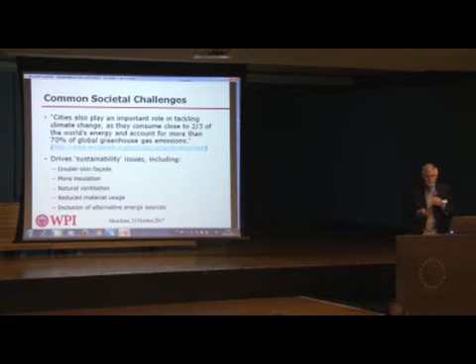We're starting to build facades that could be very concerning. Part of the challenge is that the environmental focus doesn't think about fire safety. We have a history of disciplines working in silos, separated from each other - urban planners, architects, engineers, and even within engineering, structural engineers, fire, mechanical. If people aren't really talking to each other, we set up this challenge of competing objectives, and sometimes you lose a particular feature or function of a building, and it could be a safety issue. But that's a whole nother discussion for another day.

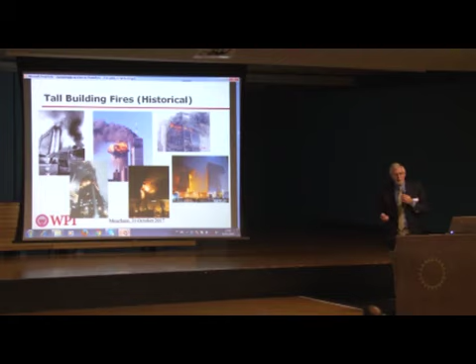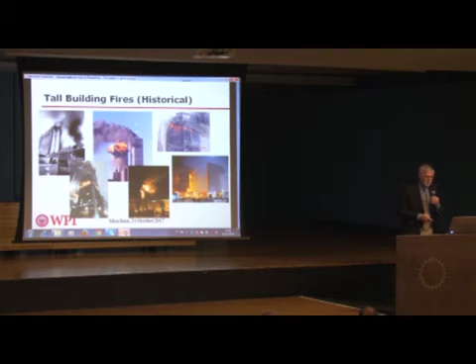I won't talk about historical fires - Professor Sekizawa did a very good job of that. But we unfortunately have very good examples of what not to do in buildings. The problem is we seem to keep repeating some of those problems. Even though we understand them, we seem to have a problem repeating them. One challenge we have today that we didn't have as much a few years ago is this issue of exterior facade fires. We started to see quite a bit of them in the Middle East region maybe about 5 years ago, and we saw quite a few in China as well.

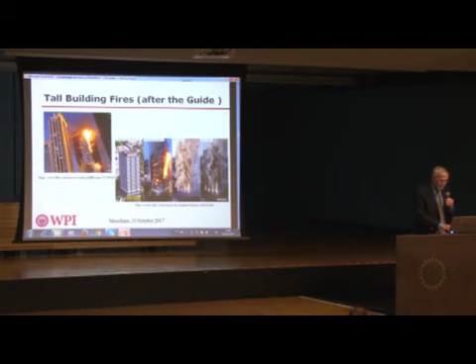We've had some fires in the US, some in Australia, as I pointed out this morning, but it wasn't until the Grenfell fire that people in countries who thought they knew what they were doing really realized there was a major problem with putting combustible exterior facades onto buildings. I'll talk more about that in a few minutes.

But other issues, like elevator operation, Sekizawa talked about that. We know we need to use elevators to move people in and out of buildings, but when you're 800 meters or 1,000 meters and you need to move people, how does that system have to work? How do you have to protect the shaft? How do you deal structurally with not having too much movement in the building so that you don't get the elevator off of its pathway?

Structural fire resistance becomes a big issue because you're not going to be able to effectively fight a fire 50 stories, 80 stories above ground. You need that structure to be able to withstand the expected fire.

Now, of course, we want to have and think about sprinkler protection, but water supplies in very tall buildings are also an issue. Here's a graphic showing the type of solution sometimes used, where reservoirs are built in at various points in the building, and water is pumped up to those reservoirs in normal time so that you're not relying on the pumps and water system in an emergency, and you have gravity feed to help you.

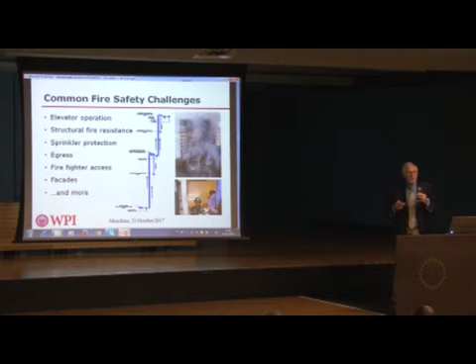And we'll talk about some of the facade issues and more as we go along. So these were all seen as issues that we wanted to somehow address in the guidelines.

In addition, there's also the challenge of local availability of materials and components. There's often the idea that you can look at what another country is doing, look at their standards, look at the equipment, but are you going to get that same equipment into your country? Do you have the same level of installation and maintenance standards? Do you expect things to work in the same way? It can be very difficult to adopt a standard from another country that assumes a certain level of technology, maintenance, knowledge, and performance, but if you don't have that where you're implementing it, it can be a problem.

The local infrastructure is similar—your electrical grid, your water supply system, all these other factors. In some Chinese cities, and particularly some Middle East cities where they're building cities in the desert, you really have to think ahead about putting in all that infrastructure and having a reliable power system. If you don't have a reliable electrical system and you build a super tall building relying on elevators for evacuation, and you don't have power, what are you going to do to get people out of 100, 150 stories? They will walk down the stairs.

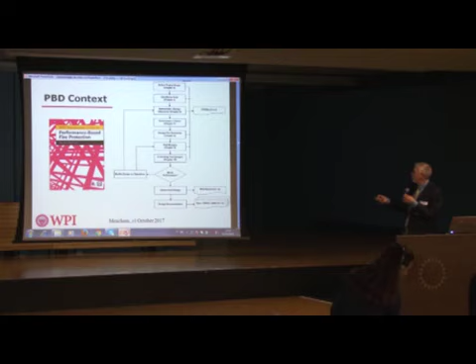So when we were developing the guideline, we took the approach that the only way to really do this was to take a performance-based approach. The guidelines assume you're following something like the SFPE guideline for performance-based fire protection, or similar, which runs through a process of looking at your goals and objectives, performance criteria, design fire scenarios, and so forth.

I won't go through that process in detail—that's a discussion for another day—but it's important because instead of just assuming regulations will address all situations of concern, you should really be thinking about the different issues and go through a hazard assessment, a risk assessment, understand the objectives you're trying to achieve with the building, what the concerns are, and go through a very structured process to do the analysis.

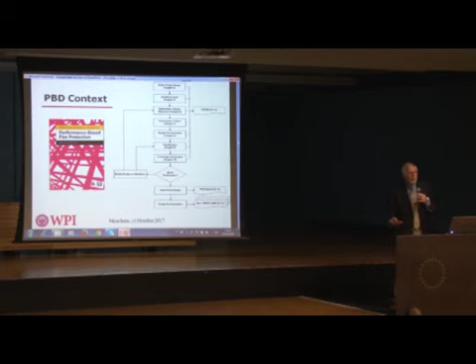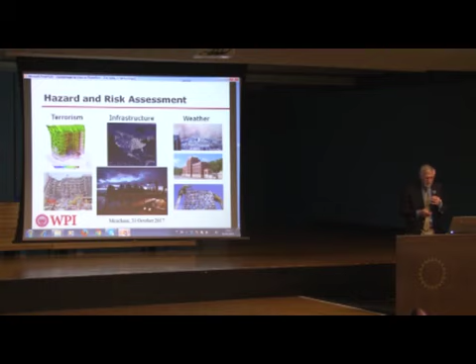So we start the process with a hazard and risk assessment. When you're dealing with very tall buildings, it's not just fire. Unfortunately, we may have to think of terrorism, but also infrastructure: the power grid going out, water issues, weather conditions like very high wind, drought conditions, and others. A tall building with a power outage is a big problem for all the people that live there. Cities have to think about that, not just in terms of fire safety, but the ability of the people, and what additional measures might be needed for life safety systems to effectively get people out in the event of a fire.

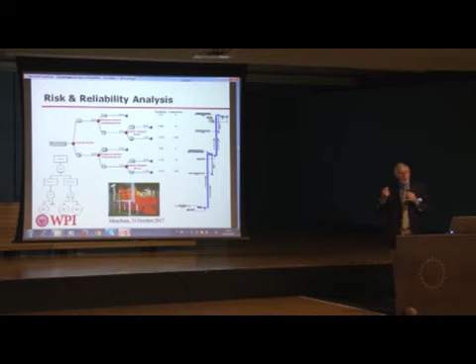We recommend that a risk and reliability analysis be undertaken on the different systems within the building. For example, doing a fault tree analysis of the different failure modes in your water supply system, power system, sprinkler system, smoke control system—all of these areas—to understand if there's any opportunity for what we call a single point of failure, where if you lose a critical system or component, you lose the capacity of that protection measure.

An example of that would be a water supply system for a sprinkler in a tall building. If you have a single riser, single hydrant system going up the building, and you have an event that causes you to lose that riser, now you have no sprinkler protection in the building. There was a very good example of that, perhaps a bad example, the World Trade Center bombing from 1993.

In 1993, the terrorists put a truck bomb in the parking area below the World Trade Center, which happened to be near the shaft which carried the communications and the power up the entire tower complex. So when they set off that bomb, you lost the fire alarm system, you lost emergency power, you lost communication. In the end, it took about 4 hours to completely evacuate both towers, in part because nobody had information.

Nobody knew what to do. People were trying to get information any way they could. Some of the bosses in the companies were telling people to stay, others were telling them to leave, and it was just a very difficult situation.

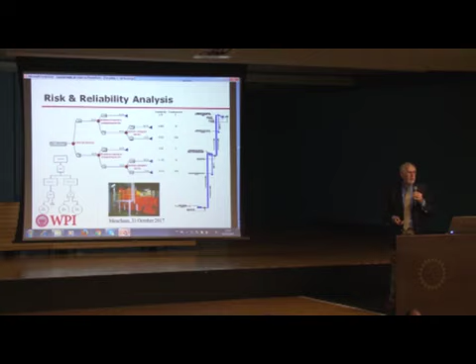We always have to go through this learning process, but we have to really think about what could fail and cause a problem. Then we look at what that problem is in terms of the fire, and we develop event trees that look at scenarios for both how the fire could spread and how big it could be if you have these failure points, but also what the impact might be in terms of getting people out of the building. So we tell people that this is required. We don't give a lot of detail, but we point to, for example, the SFPE Handbook of Fire Protection Engineering, which has several chapters on risk and reliability analysis.

As Professor Sekizawa already discussed, egress is a big challenge in tall buildings. One of the first things you have to do is identify your egress goals. By that, a simple question: do you expect to simultaneously evacuate everyone from the building? Do you expect only to evacuate certain people and keep others remaining in place? Or do you keep everyone in place except for the floor of the fire?

Grenfell, for example, in the UK, had a stay-in-place philosophy. Everyone basically was expected to stay in their homes because the compartmentation of the building was expected to keep the fire to one compartment while the fire brigade came in and did their job. But you have to decide which strategy you're going to use, because that's going to help make the determination.

Do you rely completely on stairs? Do you rely on partial use of evacuation by elevators? And to what extent do you do this combination? So then you have to look at different scenarios and strategies. This building—maybe it's a little hard to see—in Hong Kong, you see these dark areas.

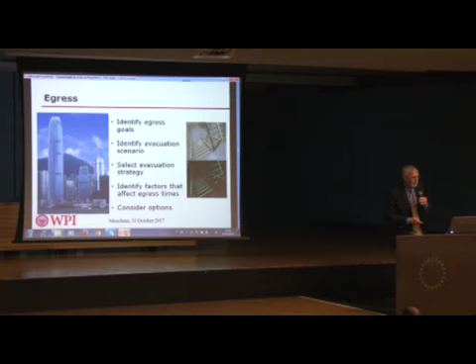So you have to look at those options and decide what strategy to take. If you are going to use stairs, you have to think of the walking time and issues of counterflow. If the fire service needs to use a stair in addition to the dedicated firefighter elevators, then you have reduced evacuation time.

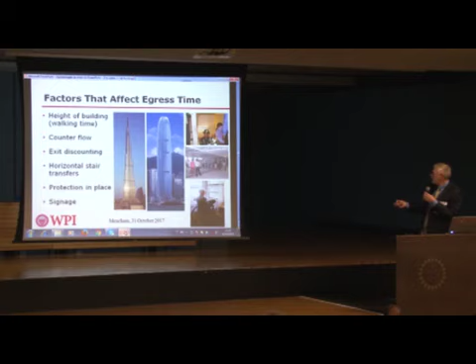Here's an example of what a refuge floor looks like. It's open to the outside, it's sprinklered, there should be no combustibles there, and it's a place where people can rest, because fatigue is an issue if you're going down 100 stories, or if someone has a disability, even a temporary one like a sprained ankle. It's something you need to think about.

Horizontal stair transfers involve coming down to a certain level and moving to another stair. It was interesting in Japan that, I may get the numbers wrong, but above 15 stories the stairs should all be continuous to the ground level. That's very challenging when you have a 100-story building.

It becomes more challenging if you want to do something like stairwell pressurization. How do you pressurize an 800-meter shaft? You don't—if you pressurize it, nobody can open the door, so you don't have an exit. This is where you have to think about competing objectives. You can't just say we'll do stairwell pressurization, or it has to be a continuous shaft, because it actually has to work. So those different types of issues are required.

Also, I showed earlier in one of the photos the Petronas Towers in Kuala Lumpur, a building with two towers connected by a sky bridge. Let me try to go back to that quickly. The idea initially when the building was constructed was that you're only going to have an event in one building. So if the fire is in here, occupants from this tower can come across the bridge and evacuate. It makes perfect sense.

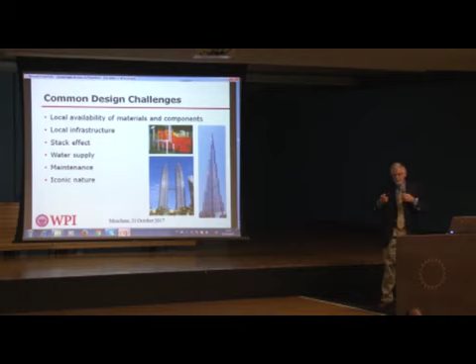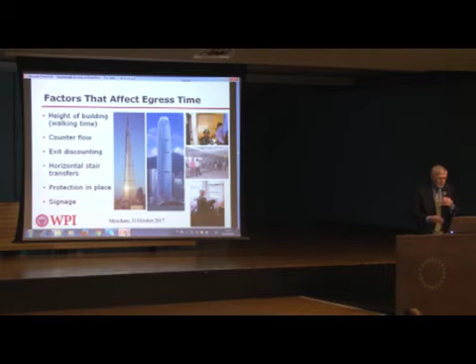As buildings get taller, that becomes a bigger issue because you have much more limited space in the building to move people. So you have to think about all these different options, and when you get to protection in place, that becomes a big issue as well.

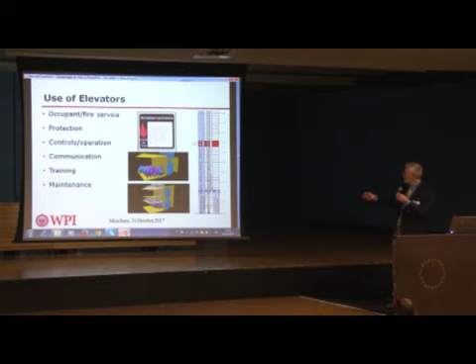Professor Sekizawa talked about the use of elevators, both occupant use and fire service use. In my opinion, it's very difficult to design a super tall building without considering elevators for occupant evacuation. One strategy is to have people come down to a certain floor by stairs and then have elevators shuttle people to a lower level. So instead of evacuating everyone using elevators, you can move only a certain segment of the building to a safe floor and shuttle people from there, which can give a more effective use and optimization of the elevators and stair use.

But there is a big concern for protecting the elevators and developing appropriate control mechanisms so that people can feel safe. The elevators have to be operational during an event if you expect people to use them. They have to be protected against smoke ingress and against water coming in, perhaps from firefighting or sprinklers on an upper floor. You have to have very reliable controls and good communication.

How long will people wait for an elevator before they go to a stair? Will they have some kind of an issue with people inside or outside of the elevator? You have to think about all of that and really focus on training, evacuation planning, and keeping those systems operational.

A related factor is that if you're going to use these elevators, they need to be powered during an emergency. So if there's some event that takes out the main power, you need to design your building with enough emergency power supply to support the elevators in emergency use, in addition to emergency lighting and other systems.

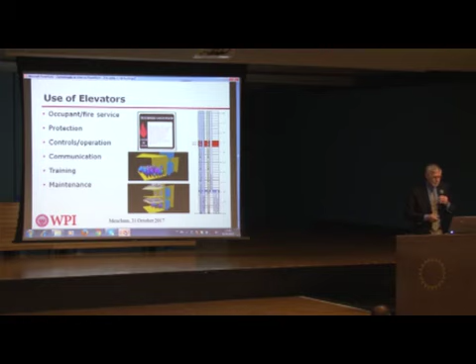Structural fire resistance, we have a number of examples in the past where if you have fire spread from one floor to another, you can have significant issues. This first one happens to be the Windsor Tower in Madrid, Spain from 2005. This is like the first interstate bank, where the fire spread externally floor to floor.

This is a photo of the Faculty of Architecture building at Delft University of Technology. It was only a 13-story building, but the fire burned for about 7 hours and led to partial structural collapse, because the fire burned up one side of the building and down the other. During the cooling phase on one part of the building and heating on the other, you had too much structural stress on the reinforced concrete, and it ended up in collapse.

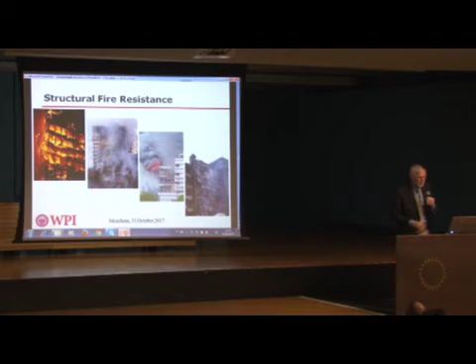So when you're doing design, you have to think about what is that movement of the fire? It's not just the compartment of initial fire you're worrying about, it's what's the potential horizontal and vertical spread, and will you have heating and cooling effects that you have to deal with, and what kind of stress will that put on the building as well.

In the design, you really need to think about what your structural resistance goals are and what type of structural system you're going to have. How will the load shift as you have a fire? Will you get appropriate load redistribution? What's going to happen to the primary structure relative to the fire? Will you have spalling? Will you have loss of fire protection over time? You need to think about the different scenarios you're going to assess the building under, and pick strategies that are appropriate for the resilience.

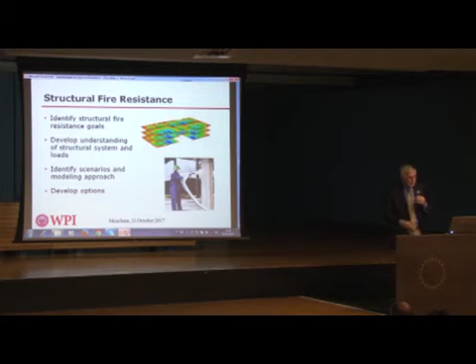One of the big challenges with structural fire protection is that we have a significant reliance on the standard fire test. In ISO, ASTM, and other standards, we have a standard design fire curve which talks about how much temperature you have increased over a particular period of time, in minutes or hours. But fire in a building doesn't know anything about the standard fire curve. It may be great for comparing products, but in reality, we have fires that may burn much hotter more quickly.

We have fires that might be longer duration. We have different effects. For example, I've done some work recently on post-earthquake fire performance. One of the issues you have in an earthquake is you get some damage, for example, to your fire protection system, such as gypsum wallboard. And when you have a fire after that damage, you can get failure of a 1-hour system within 10 minutes.

That fire rating in a furnace is based on perfect conditions. But you rarely have perfect conditions in a building, normally over a long time, but certainly after an event like an earthquake. So if you're assuming you have a 1-hour fire resistance and you breach that protection in 10 minutes, you're going to have a much different challenge on your hands within that building.

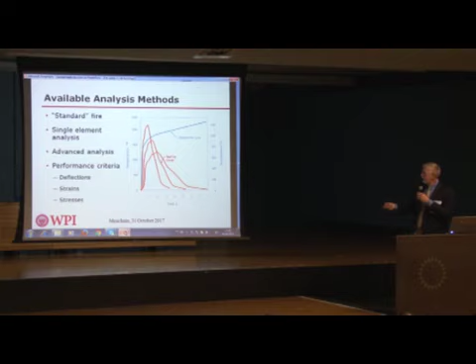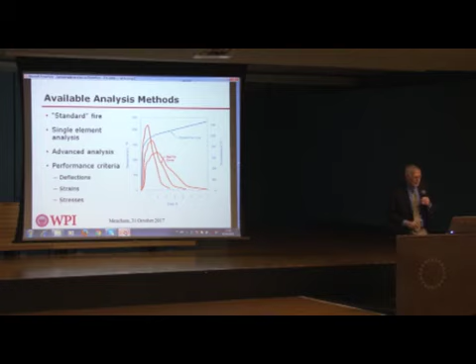So you need to think about what your real fire scenarios are, what type of analysis you want to do, and what your criteria are. It might be deflections in the members—it doesn't have to be full failure. But if you have a little bit of deflection that opens a gap in the facade between the floor plate and the curtain wall, allowing fire to spread, now you've created a fire spread mechanism. The deflection of the structural system could have a significant impact on vertical fire spread. All of these types of issues really need to be considered.

Here we now have the issue with combustible exterior facades. Many buildings have things such as aluminum composite material panels, which are aluminum, zinc, magnesium, or other metals on the outside, but with a polyurethane or polyethylene core, which is combustible. Part of that is there to provide thermal insulation, and that is a result of some of the sustainability issues that we're pushing in terms of kind of a global society.

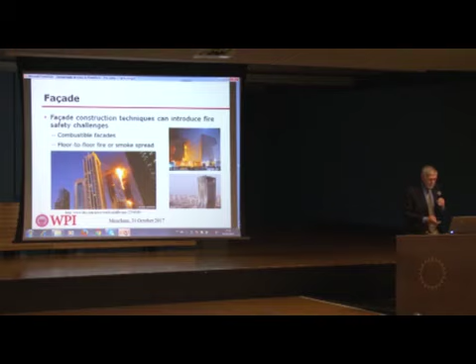And we saw about the fire at the Mandarin Oriental Hotel, at the CCTV building, and some in the Middle East. But we really have to think about what could happen in a building to ignite those fires.

Professor Sekizawa talked about spandrels and different challenges, but you also have to look at the height of the floor and the size of that ventilation opening, because you're really looking at the length of flame and the extension of the flame. The problem is you're looking at a radiant exposure to the glass.

So if you don't deflect that flame far enough away and the flame goes up the side of the building, then you can still get an issue in terms of breakage of the glass, which could propagate the fire.

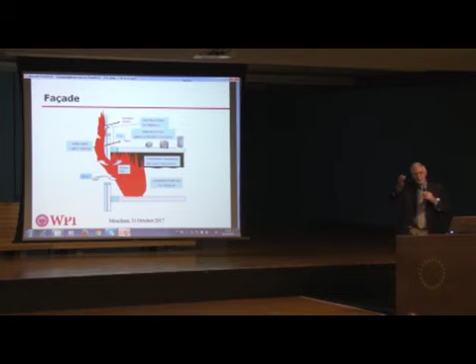There's a lot that can be done with fire stop materials like we see here that can bridge the gap between the floor deck and the curtain wall, thinking of the size of the spandrels. But we also need to think about wind direction. When you're thinking about your spandrel height and other design features, where is the prevailing wind from? What are the wind effects on the building going to potentially do to your flame?

So those types of issues have to be dealt with. Grenfell may be recent, but we've known about combustible exterior facades for a long time. This is a high-rise hotel at a casino in the state of Nevada in the US from 2008, where the fire burned up the exterior of the building. In that case, behind the facade was a concrete wall, so the fire didn't enter the building — they got very lucky.

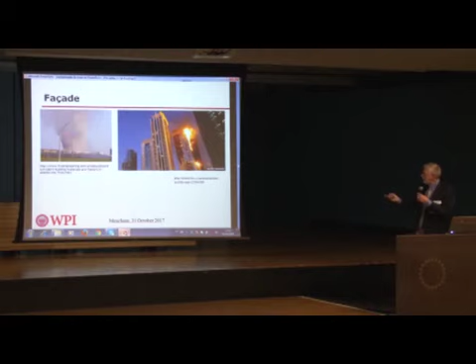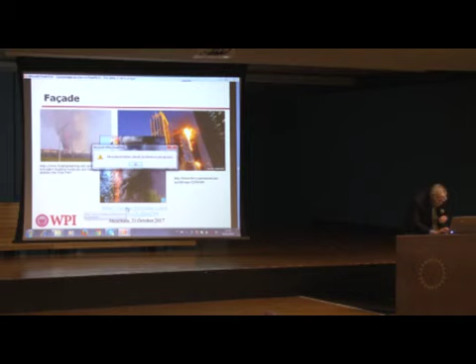We've seen many of the fires in the Middle East as well, and I don't know if the internet is working here, but this is one from France. So I don't think I have internet access, but...

If you haven't seen this fire in France, you should go onto YouTube and just search Tall Building Fire France, because the videographer, somebody with a cell phone, happened to catch the building fire when it was just in one compartment, and watch it go to the top of the building in less than a minute.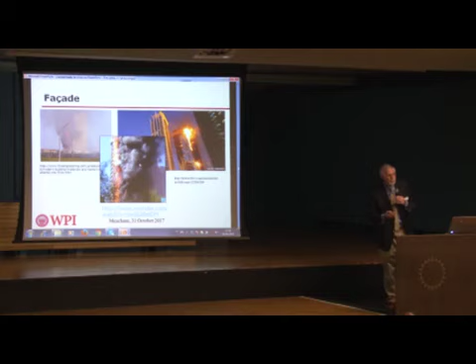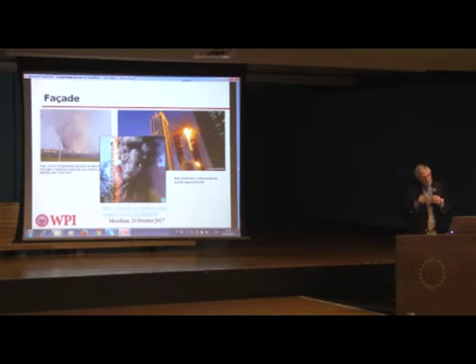I think it's a very powerful video, because unlike Grenfell or the CCTV building where you see the fire once it's fully engulfed, if you see the actual rate at which the fire can spread, then you get a very interesting understanding of what the challenge really is. So do that search on YouTube, I think you'll find it interesting. It's also a very good teaching tool.

Grenfell was mentioned a few times, and the building was renovated for energy and aesthetics. This is one of those situations where we talk about competing objectives — if there were no need to upgrade the building for energy performance, you might not have had this issue, or if they had picked a non-combustible insulation, there might not have been an issue.

But once the fire started, because there was so much combustible facade material as well as thermal insulation under the facade material, you completely engulfed the building. There was this issue that on the exterior you had this ACM material, aluminum composite material, then there was an airspace, and then against the wall was a combustible insulation layer.

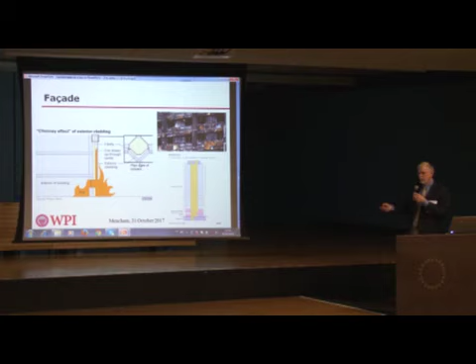So you actually had parallel plates of combustible material, you had a ventilation shaft, and you had fire spread in between. That's another reason the fire was more severe than if you had just the fire on the exterior, because you had much more material involved.

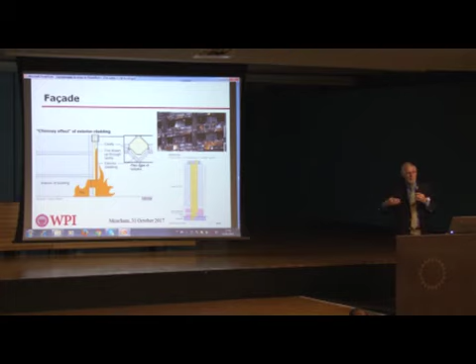And then when you start to think about it, if you have a lot of material burning, you start to break windows, you get radiant ignition inside of the apartments in the building, and pretty soon all of the building is on fire. So again, you have to think about not only what the structural performance is, where are the window openings, how the fire might get into the building — it's all very important.

Suppression systems, I talked about before — thinking about different issues like whether you have to put intermediate water supplies, how reliable does the piping network need to be, what are you talking about for system pressures and flows when you're at 800 or 1,000 meters. So you need some pretty strong pumps to be able to move water up there.

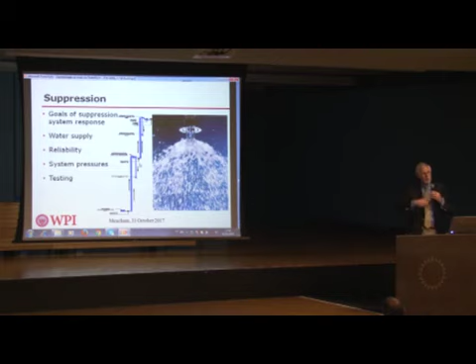You need to have that planned in advance. You want to have the water there and not rely on the systems during the emergency. So those are all part of the design phase issues. But we need to think about that with detection and alarm systems as well — you want to think about redundancy and survivability, especially if you have voice communication.

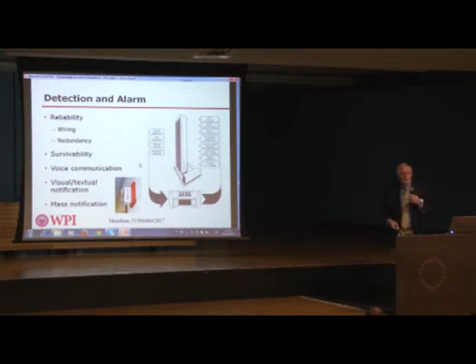So you're not running all of your cabling in one conduit. You have multiple communication paths, so if you lose one channel or one line, you have other options for continuing that network.

Smoke control is a major issue as well, and we learned our lesson in the US in the 1980 MGM Grand Fire, where a fire in the casino level ultimately killed more than 80 people, mostly in the upper levels of a hotel because of smoke migration up the elevator shafts, stairwells, and so forth.

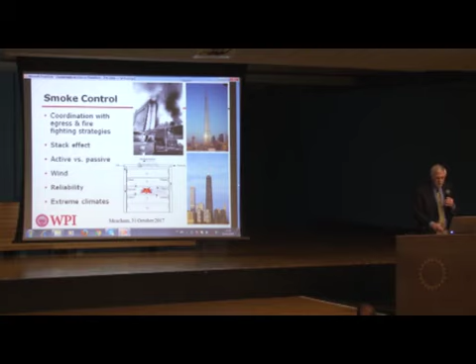We've done pretty well about providing good smoke protection and compartmentation, but as you get into very tall buildings, you're getting issues of stack effect and wind effect that make it very difficult to control for pressurization and other types of systems, especially if you're looking at pressurizing shafts for evacuation.

You have different effects if you're in a cold environment where it's cold on the outside and warm on the inside, as compared to what we call reverse stack effect, where it's typically warm on the outside and cold on the inside. That'll have a difference in terms of where you're likely to see the smoke pushed and how that's going to impact different levels of the building.

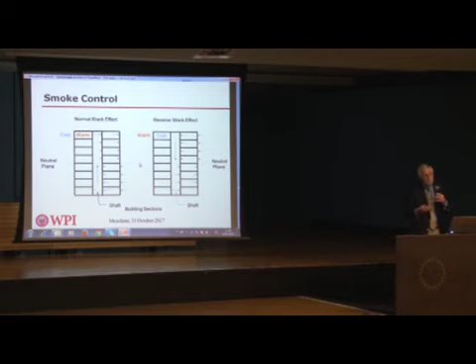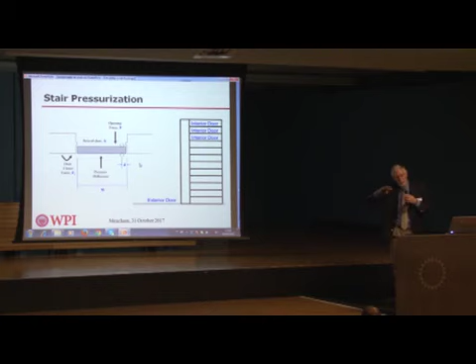I had mentioned earlier, if we're thinking about continuous shaft for evacuation and you're looking at pressurization systems to keep smoke on the fire floor and not go into the stair, that's fine, but you need to be able to open the door. Occupants have to get out. So if you have a very tall building, you might have to split that shaft. One continuous shaft will not be able to be pressurized and still be able to open the doors. So you have to think about those types of issues as well.

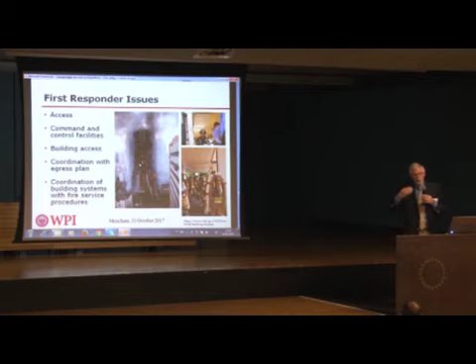Fire service, first responders have a number of issues. As buildings get more dense in terms of the city and get taller, it gets really hard to get access to the building with apparatus. It's also very difficult to get very high in the building with all the gear that needs to be brought in. So a lot of planning needs to be done in the building design phase to accommodate fire service needs in terms of communication centers, air filling, access for equipment, coordination with other building services, and so forth.

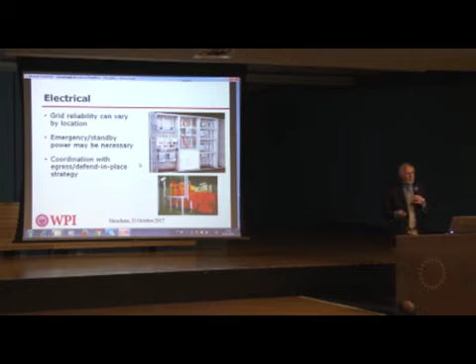I've already mentioned electrical reliability and standby power may be necessary. We have to deal with that, which is important. And we also have to think about buildings under construction. We can have significant fires when buildings are under construction, and when the fire protection is not in place, then your failure potential is much higher.

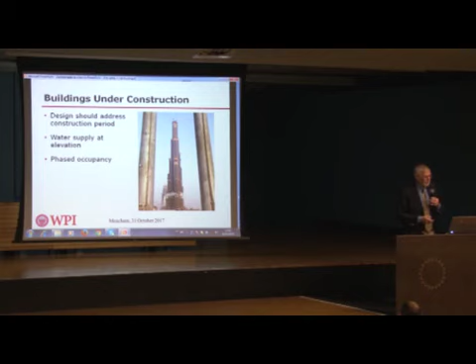So what is the plan for protection during construction? Is there water supply on site? Is there a hydrant system or a riser system for the fire department? Is there a partial sprinkler system? You can't think about waiting till the building is completed. You have to stage that fire protection. Otherwise, you could have a very serious problem in a fire that you're not going to be able to fight.

One of the last things that we really need to think about is test, inspection, and maintenance, fire safety management of the building. We need much more reliable systems when you have these cities in a building, and so you have to have very good operations and maintenance manuals, inspection, test, and maintenance cycles, reporting like I talked this morning about the warrant of fitness, to make sure that everybody understands their responsibility with safety management in buildings.

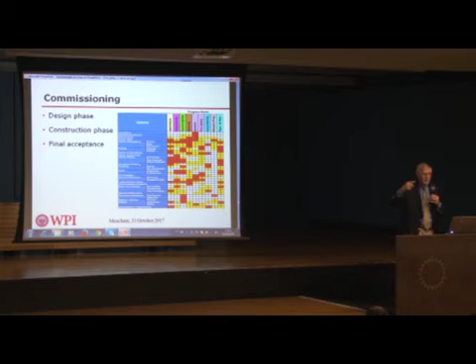And before the building is even occupied, you have to make sure that you test all the systems. In the past, people only did a representative sample of smoke detectors and different systems to make sure they work. But if you have this complex network of smoke detectors, activating pressurization systems, recalling elevators, and doing all of these other functions, you need to test that every system is working appropriately so that a fire on the 47th floor doesn't send the elevator to the wrong location. So it becomes very important to really think about those issues.

So finally, the last point in the SFPE guide is we knew the guide couldn't cover everything, but there's a lot of resources that are identified to help address some of the issues of reliability, egress analysis, and other issues appropriate to tall buildings.